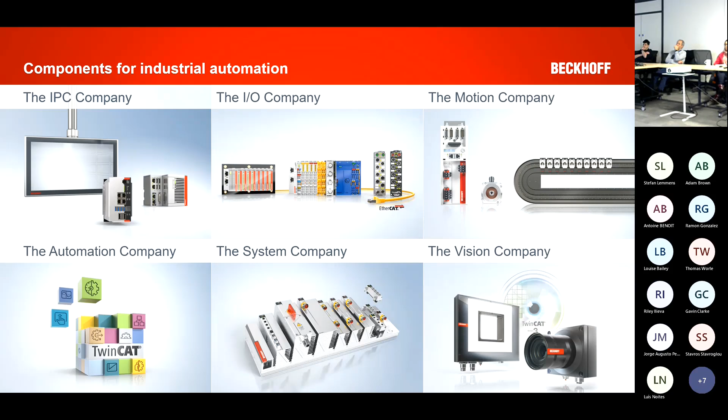The company is now growing and is incredibly large. It's based in Verl, Germany, where all of our manufacturing is done. But we are up to about 5,000 employees now, nearly half of which are actually engineers. So it's quite an engineering-led company, which makes it quite nice to work for. We are still only owned by the one guy that started us, Hans Beckhoff, which is quite entertaining when you can literally walk into his office and have a chat with the bloke that invented it all. A really nice, pleasant place to work, actually.

So the first thing to mention about Beckhoff is the core idea of the technology is PC-based control. The whole point of what Beckhoff tried to do when it started in the 80s was to move away from microcontroller embedded platforms to PC-based systems where the PLC, the motion system, the safety, the HMI, everything was software implemented as modules that could be downloaded into a real-time system, which is TwinCAT.

And that portfolio of software elements is now growing to include kinematics, robotics, vision systems, machine learning integrations, OPC UA. It's expanding year on year. It's quite difficult to keep up with, to be honest.

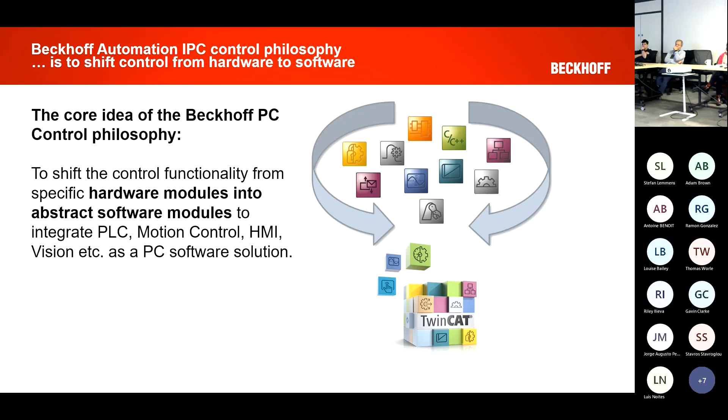Hence, as with every other manufacturer in this world, we've been hit by the part shortages in the exact same way. We're now almost back up to capacity with the parts coming in, so that's a nice thing. But there's still a backlog, so that's a downside. But yes, we are slowly getting there.

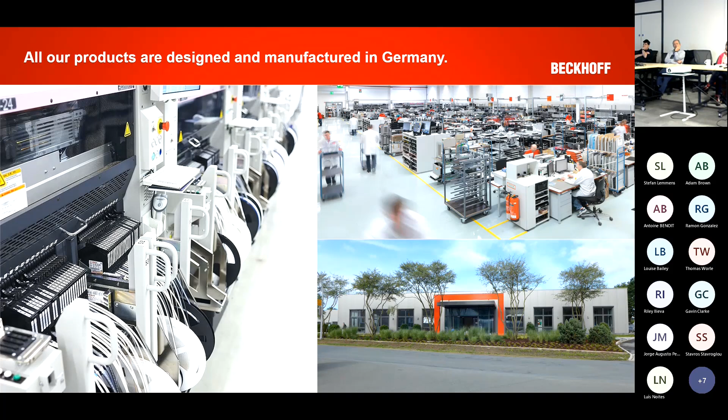So, moving on from that, what I actually wanted to talk to you about today was the machine that we created as part of my doctorate. What we were looking at the time was how to save fuel. My professor was very into peak oil, the calculations around that, and how we could reduce human oil consumption and make savings wherever we could.

A lot of effort's also been devoted to tidal energy, wind turbines, micro fusion reactors and so on. His concept was to take the things that we know we can't deal with with wind turbines and so on, and to reduce the oil use that they have. So what we looked at was what's known as rubber-tyred gantry cranes.

They're huge 80-ton structures that operate at most container ports. If you've ever seen any of the news recently about imports coming in for the port of Felixstowe, you'll have seen them. They look like big ants. Yeah, they drive around all day and they lift and lower containers, the lightest of which is about 12 tons and the heaviest is over 50.

To do that, they use a 500-kilowatt diesel engine. It goes through a generator into an electrical room, but then runs a lot of electrical motors. Okay, so actually quite an advanced drive chain. If it was a car, it would be a plug-in electric hybrid at this point, so not too bad. However, a 500-kilowatt diesel engine is quite a lot, and there was absolutely no regard for regeneration at all, even though it's obvious because you're lowering lots of large mass that you're going to get regenerative energy.

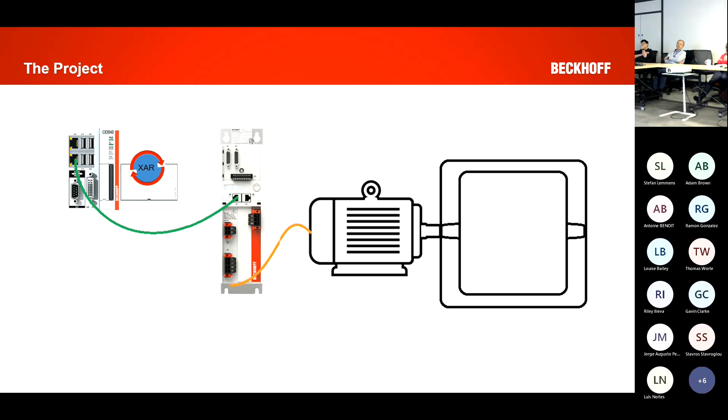Sorry. If you do want to stop me anytime, just jump in and ask questions. Otherwise, it's just me talking, and even I'm bored of that.

So the first point, how we got the communications going. The first and most important part of this system is EtherCAT. Is everyone generally aware of EtherCAT? I've never heard of it. Okay, some nods, not many. So EtherCAT is an Ethernet-based fieldbus that was invented by Beckhoff and then released as an open standard. So there's now something like 6,000 organizations creating solutions for it. And for motion control, I might be biased, but it is the best one to use.

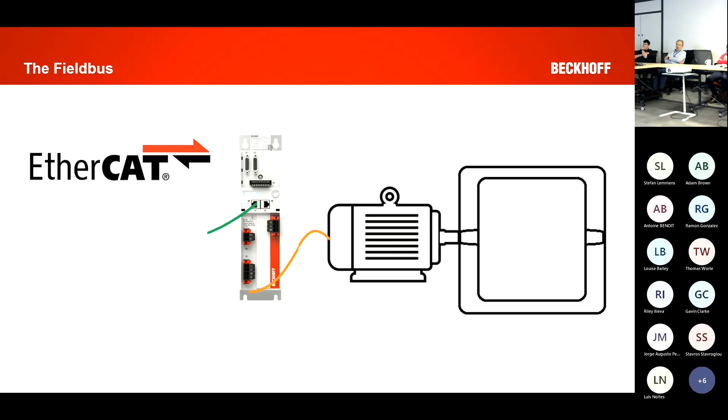Because of a number of features. The first being that the network will actually build itself. So gone are the days of having to actually go through, set in IP address names, and actually do a network plan. EtherCAT doesn't actually really care what your network topology is at all. When you connect a set of EtherCAT devices together, they will auto detect the devices next to them and build a network out of themselves.

And so the only effort you have to go to, and I can show you this on the demo rig later, to get this is to run a scan of your EtherCAT network. It will then return you your configuration, and away you go. That's it, job done. So that's quite a significant benefit and a time saver.

One of the important points about it as well is that because every single device in an EtherCAT network is an EtherCAT device, that may sound silly, but what I mean by that is there's no sub buses being run or anything like that inside the network. Every single one of these devices can be synchronized to every single one of the other devices for a system called distributed clocks, but it's just a built-in part of EtherCAT. What that means is that we can be sure when a device generates an output or gathers an input from a sensor, the connected sensor or actuator, to within nanoseconds of each other across an entire network.

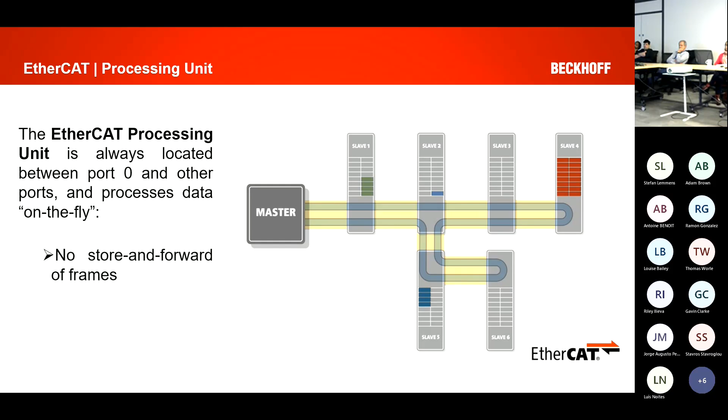So that was one of the reasons. It gave us that flexibility. We didn't have to worry about where the drives were. We didn't have to worry about what they were named. They could be swapped in and out as we needed to, because one of the benefits is you can just change these devices. As long as it's the same device you're putting back in, the network doesn't care and can carry on running. So it presented a number of massive advantages. Make sense? Cool. So that's EtherCAT. As I said, no store and forward and no software delays in it.

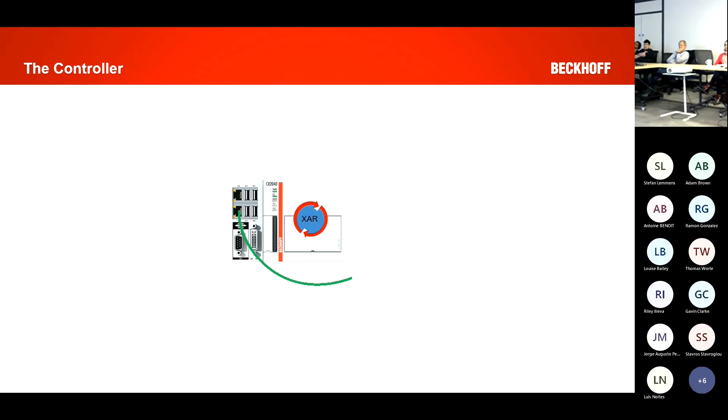Which left the controller. What did we pick for that? Now EtherCAT is a much more open protocol. There's lots of different options you can go for. Obviously, from the T-shirt, you can tell which one I went for, Beckhoff and their IPC systems and TwinCAT technology. So the first element of this is TwinCAT itself. TwinCAT's a software platform that we use in order to create real-time executable modules that we can run in a real-time environment called TwinCAT, which then runs our EtherCAT field bus.

From here, we can create anything from PLCs, motion platforms, C++ modules, Simulink modules. We could have multiple PLCs in the same thing. But the main element here is the fact that they all agree to follow the same module platform. It was taken from sort of Microsoft's COM principles, except we call them TC COMs. So same idea. So in theory, if you could program to one of these, you could put any language you like in here. And we do. So we have C++, as I said.

PLC, we now have machine learning things that can write directly into it, vision platforms that can also write directly into it. So it's a really useful open environment for me to program in. At the time, I was using text-based languages, so most of that became structured text straight away because it conforms to the IEC 61131 for the PLC systems. So that was useful. And the benefit of that was it gave me that open platform that I could then attach anything else I wanted to.

Okay, we'll come on to how I did that in a little minute, but it gave us that runtime that could run an EtherCAT master, run an EtherCAT network at the speeds I wanted to run at to get the response I wanted. So effectively what I was doing was shoveling set points out to that switched reluctance drive to make sure that motor was turning exactly the way I wanted it to turn, to optimize the energy going backwards and forwards through the flywheel. Because obviously every little percentage gain in that process removes a multiple of 2 in terms of efficiency going back the other way once it comes back out as electrical energy. And that was the main point of the entire thing.

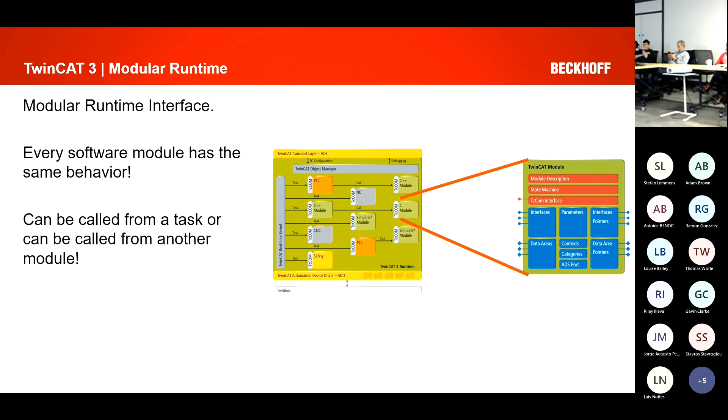The other side of that is the nature of the IPCs. Obviously got some demo units here, but what you've got is one of the industrial PCs. So this runs a full Windows OS, and a compact embedded version, that sort of idea. It's a fully compact embedded system that's meant to go in a cupboard and be locked away for 20 years and forgotten about, effectively. So they are effectively locked as they are day one after they come off the production line. Whereas these, you might think of them more like a standard laptop. We will upgrade them as time goes on, put later processors in them. So every generation of this becomes more powerful.

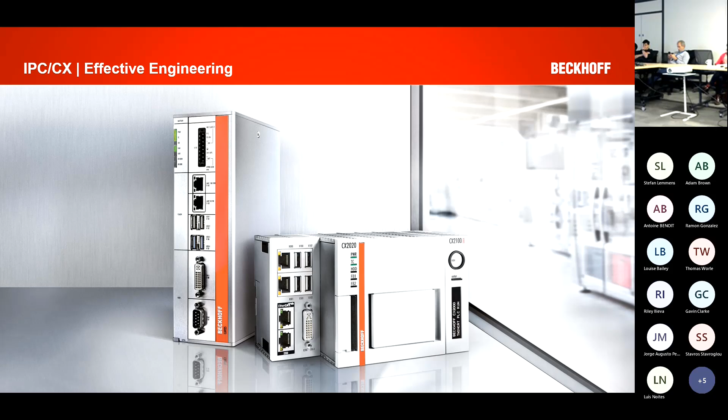But with the CX, what we can say is that the same CX can be built in exactly the same way 20 years after the first one rolls off the line. So you have guaranteed components, guaranteed supply of that device for that length of time, and that was critical in the application we were doing because it was going to go on a crane and be forgotten about, and we were going to come back 10 years later, dust it all off, and check that it was still working. So the whole principle of it was it had to be able to last that long, which meant we couldn't go down this route of industrial PCs. That was the application. Okay, so TwinCAT runtime on the Beckhoff PC gave me the longevity and the speed I needed.

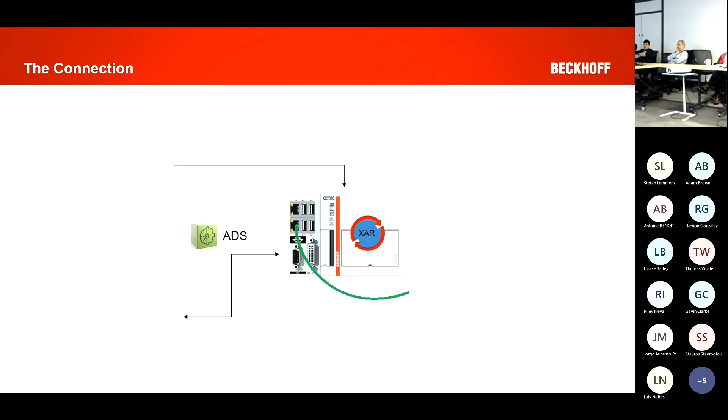But how to shovel data in and out? Beckhoff originally decided to use a system called ADS, which was their own communication technology that they created to specifically handle non-real-time to real-time communications. So our runtime here that's actually running underneath in a kernel has an ADS server, and that's what allows it to talk to the outside world. So ADS is now a completely open protocol. In the same way as they did with EtherCAT, they created it and then made it open. So anyone can create an ADS server to connect to a Beckhoff device or something else running ADS. We give it away for free, so you can have our implementation of it for free.

But what it does is it allows you to connect multiple things together using a standard communication system that is open for anything you like. Most of this is hosted on GitHub, so you can go and download the source code off GitHub to create your own servers. We have a number of customers doing that at the moment. Or you can use our DLL, which is on GitHub again, and that's free or downloadable as a NuGet package. But what that did let me do in this case is talk from my runtime with all my applications running on it, which were data loggers and stuff, because I needed to make sure what the energy was doing, errors and stuff on the system on the crane. It gives me access via the ADS protocol to the outside world.

So this block effectively can be anywhere on the planet, and it can be multiple things. Yeah, so you can have multiple routes talking to a system at the same time from anywhere. Okay, which is obviously then the lead into .NET based programs for our HMI and for LabVIEW and MATLAB Simulink.

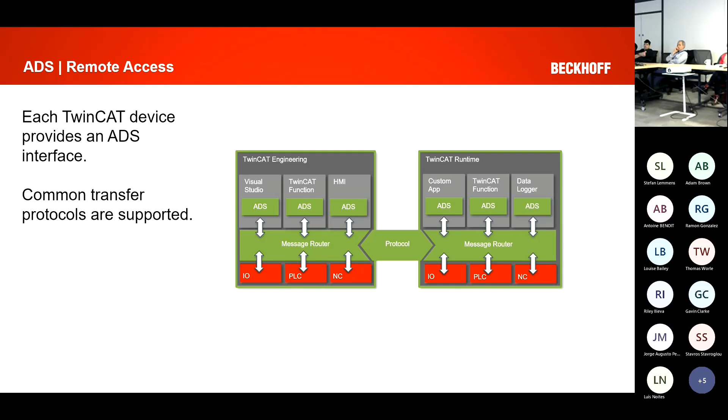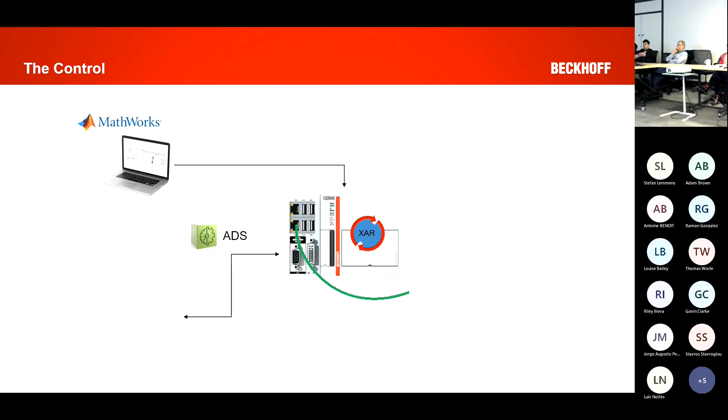Okay. So the first bit, as I said to you, I was lazy when it came to programming, and I wanted to do it all in fuzzy logic because that's nice and easy. It's just little graphs that you move backwards and forwards to make decisions. And I chose to do that in MATLAB because the university had a license for it, effectively.

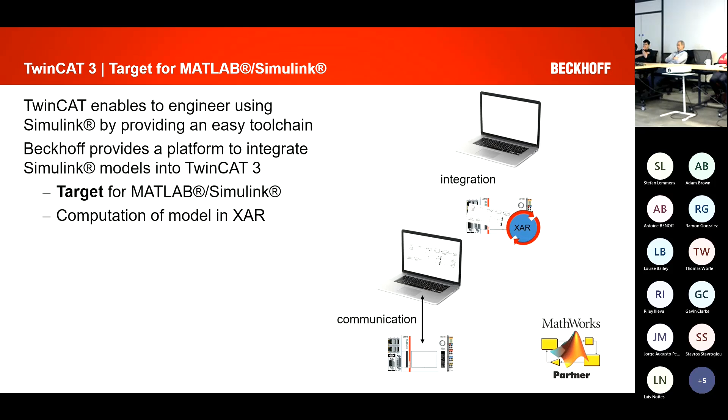Now, what we are able to do with that, and the beauty of why I chose it, was that TwinCAT can accept a complete MATLAB module and accept that as a TcCOM object, which it then runs in real time. Okay, so there were no conversion processes, nothing for me to actually do to get that to work. I could effectively just create something in Simulink and have that running directly on the real-time architecture.

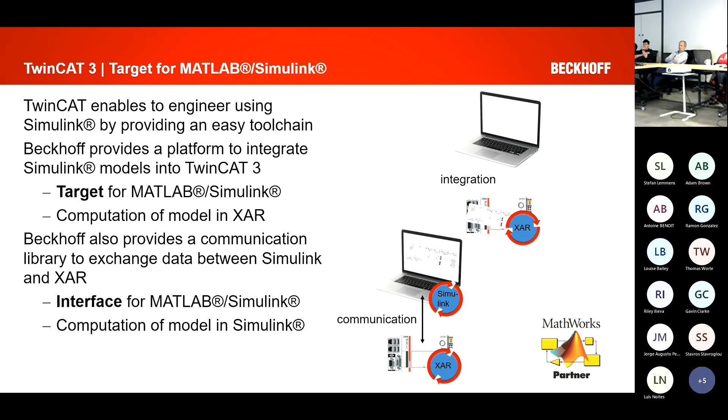And because of the ADS system, I could effectively then create a link back between TwinCAT and my MATLAB Simulink system and effectively create model-in-loop control. So I could keep updating the parameters in my model and dropping them into the real time to tune the system to give me better efficiency, to modify the fuzzy logic control to decide when to use the energy in the flywheel better, live. Okay, it was quite a useful tool.

I do have all this on the laptop. I was aware that obviously some people join me by Teams, so I can roll it out. It doesn't look as good in small.

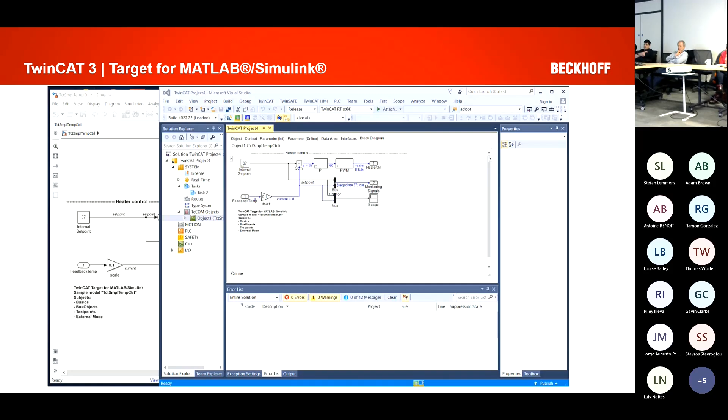So I was able to, as I say, use most anything in Simulink or MATLAB that can be compiled to real time, which meant I was able to use the Stateflow systems they create, as well as the fuzzy logic, to actually create a full control system in it, without having to learn all the other stuff, which was quite nice. And it's a really easy drag and drop system in TwinCAT to actually implement it.

Then we need to analyze the data. And there were people that asked us why we didn't analyze it in MATLAB, and it was because the person that was doing the PhD for analyzing this data worked in LabVIEW. So I learned LabVIEW, effectively. And it was that simple. And just like MATLAB, we could connect into the runtime using ADS.

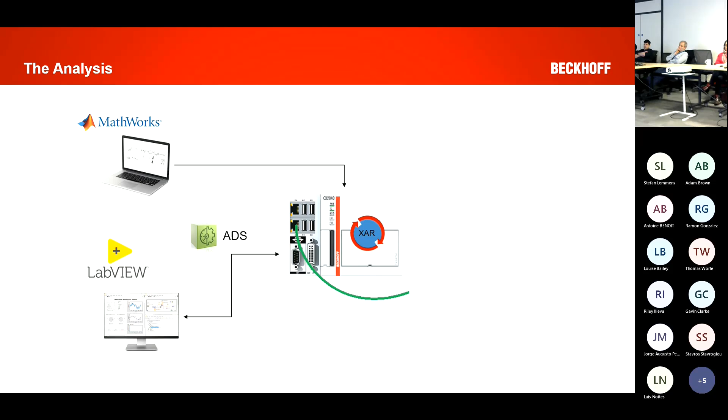Yeah. So we now have a set of client VIs which can be dropped directly into LabVIEW itself, which make life a lot easier for type resolution and that sort of stuff. Because one of the big problems going from PLC to non-PLC, whether in .NET or Python development, is the fact that PLC types are just whatever the IEC made up, and everyone else uses a standard set of types and has agreed on them. But can't keep blaming them for just doing their own thing.

And what this allows us to do is have TwinCAT running a real-time control system alongside a system running LabVIEW doing the data and analytics, providing the front end, as it did in our case, of what was actually going on, real energy on a system. And we actually in the end got it to rebuild the model, because once we had ADS into the Beckhoff system, we could actually retune the MATLAB model in LabVIEW, which blew my professor's mind, and retune it using actual live data that was coming off the system, which is actually really cool.

Yes. So same sort of idea as the MATLAB video. The difference between the MATLAB integration and the LabVIEW integration is that LabVIEW is a data gatherer essentially. We can pass data in and out of TwinCAT with LabVIEW, but we don't have a full integration to take a LabVIEW VI and put it into TwinCAT currently.

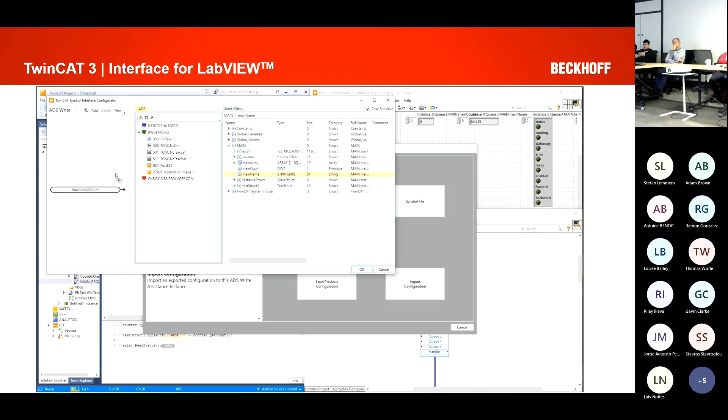And then on the live system that we demonstrated, we actually got up over 35% energy savings, which is a lot more than we thought we'd ever achieve, to be honest. Calculated out in numbers terms, we thought that it would save them roughly 3 million pounds worth of fuel a year, and that was back in 2014. So a long time before. I don't know what it would be now in today's money, but it was a lot more.

Sadly, they didn't offer to pay us any of that, which was upsetting. But you can't have everything.

Cool. And then there's the corresponding write one. So we can actually then use a write block to grab the elements and drag them and push data back into the PLC as well. Because obviously, just gathering data out of it can be really useful as data acquisition if we're using LabVIEW as a sort of analytics system, which a lot of our customers do. But actually being able to push data back can also be incredibly useful.

So you notice here, I can then write that into my LabVIEW front end and update the string variable inside TwinCAT. Works incredibly well. But that's the sort of use case we did for it. So the guy was able to take all the data I could throw out of ADS, I set up a nice structure for him so we could grab it all out, bring it into LabVIEW, and then do a lot of maths and wizardry on it to work out what we should be changing to make it more and more efficient each time.